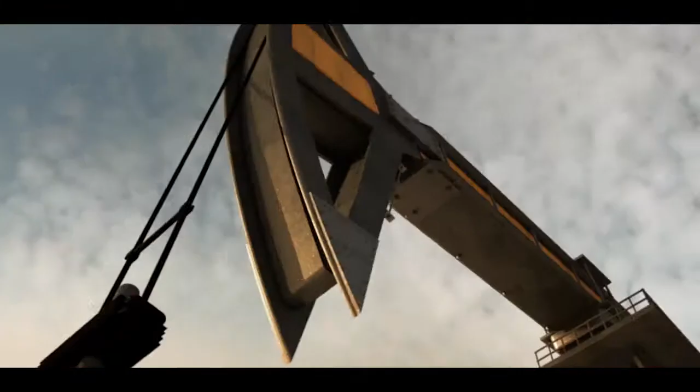No one ever took it for granted. Having been born in the depths of the earth, it became a treasure that gave humankind the power of heat and light, the luxury of freedom, and the might of energy. Natural gas entered each and every home and became a natural, integral part of everyone's life.

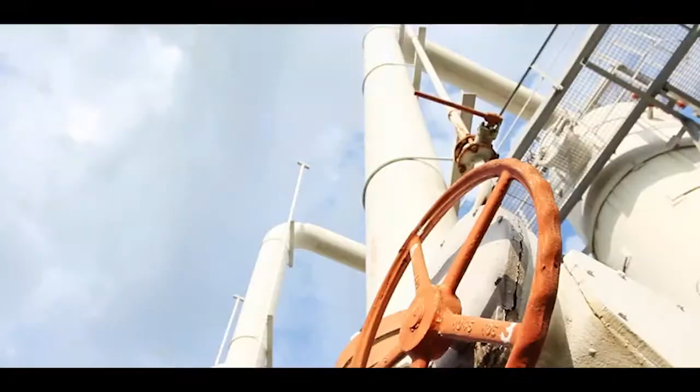Behind its apparent simplicity, however, there is an extremely complex but wonderfully balanced mechanism. The success of this mechanism depends substantially on the performance of our products, which are central to any technological process in the gas industry.

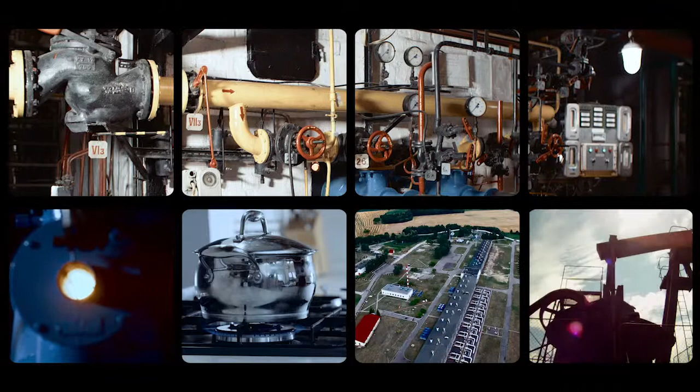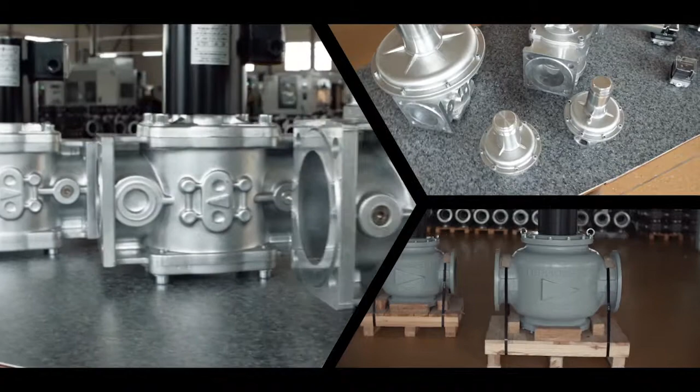Valves by TermoBrest ensure safe and smoothly continuous operation of gas-powered equipment, such as large-scale power facilities providing heat and electricity to entire cities and regions, and household appliances, the undisturbed operation of which ensures comfort in our homes.

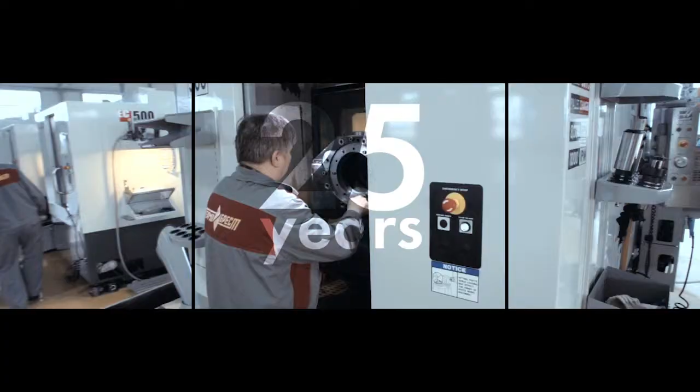From the day of its incorporation and until today, our company has been firmly adhering to three basic principles: quality, reliability, and safety. 25 years of hard and painstaking work, research, trial and error, and ongoing innovations made TermoBrest one of the leaders among gas equipment manufacturing companies in the entire Eurasian continent.

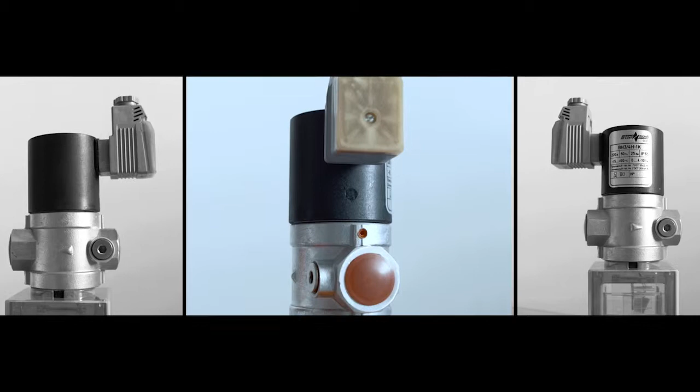At our conception in the early 1990s, we started our journey by manufacturing and offering to the market only 3 items of gas equipment. Striving to meet growing demands of the market and to attain excellence, we have never stopped on the achieved, and responding to the challenges of time in the market, we took every opportunity to improve available products and broaden the number of series of items manufactured. We currently manufacture and offer to the market more than 7,000 types and series of items.

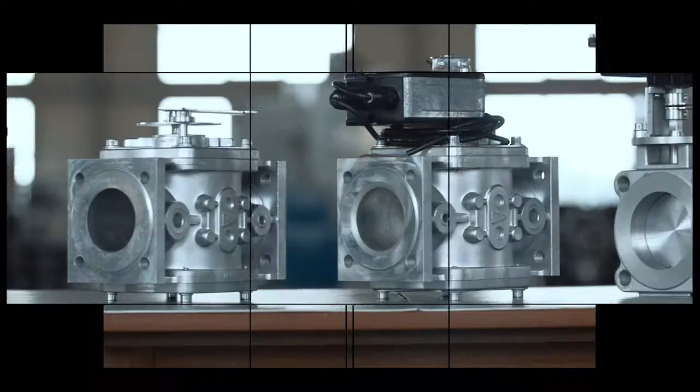And keeping up with our tradition of always striving for more and better, we are not planning to stop innovating. Today's TermoBrest is a modern, large-scale, highly technological company with an almost completely closed production cycle.

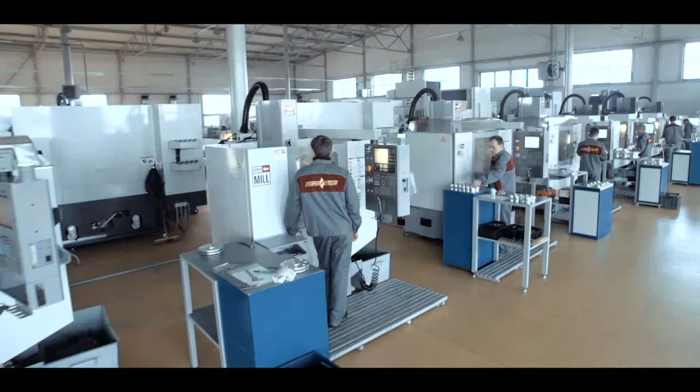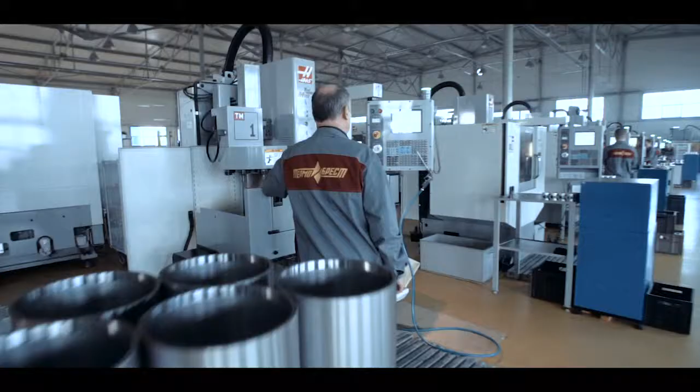We value our reputation and pay special attention to the quality of our products. We use the latest high-performance equipment, the best quality components and raw materials. Our employees are highly skilled professionals who are best at what they do and are constantly improving their skills in order to be always ready to respond in a timely manner to the challenges and demands of the market.

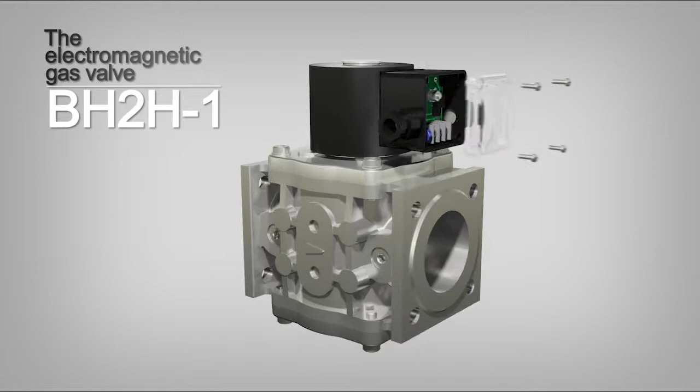Our product range is vast, diverse, and constantly expanding. Let's take a closer look at the composition of one of our base products, as an example of the most popular and marketable of the products manufactured by TermoBrest: the electromagnetic gas valve BH2H-1.

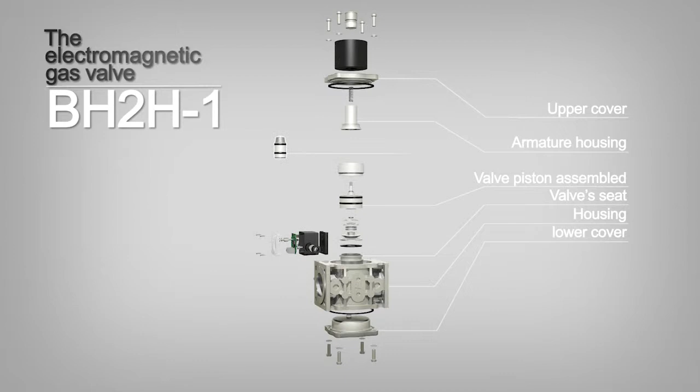Main components of the valve are as follows: housing, upper and lower cover, valve's seat, armature housing, valve piston assembly, armature, spring, electromagnetic coil, and sealing made of oil-resistant resin mixture.

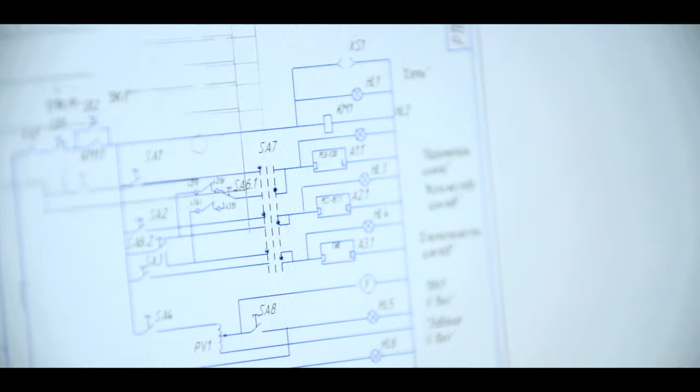Like everything else in this world, our company's production process starts with an idea. Conceived in the Department of Construction and Quality Control, the idea is then refined, improved, repeatedly checked, and brought to perfection, following which it is sent to production.

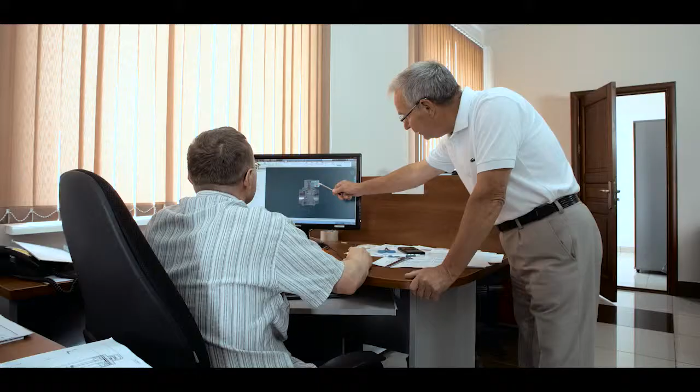Each of our products goes a long way from the first stroke of a pencil on the paper to make an initial sketch to the creation of a 3D model. We simultaneously develop casting tools for the production of the base parts of the valve, which are the body and the caps. The entire production process is monitored by the construction and technology team.

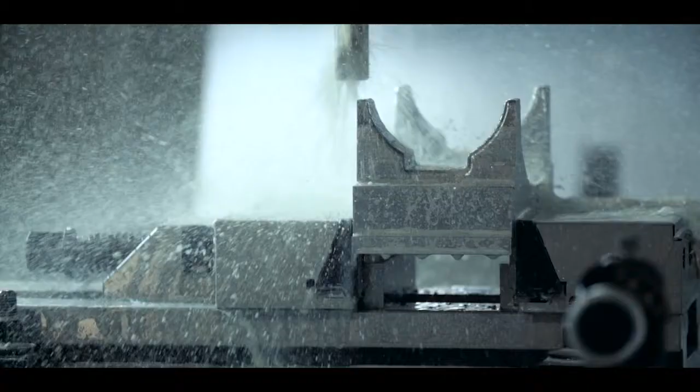This team also oversees the creation of operating schedules, calculation of time slots and material consumption, choice of tools, development of the programs for NC machine tools, and other critical processes. The team develops the process of manufacturing components, casting, and technological tools.

And finally, when the idea has acquired its tangible shape, it sees the light of the foundry, the most sizzling of all the departments in our company. Our foundry is unique. Highly qualified professionals, modern equipment, and years of experience allow us to produce castings of the highest quality, on par with those made for aviation.

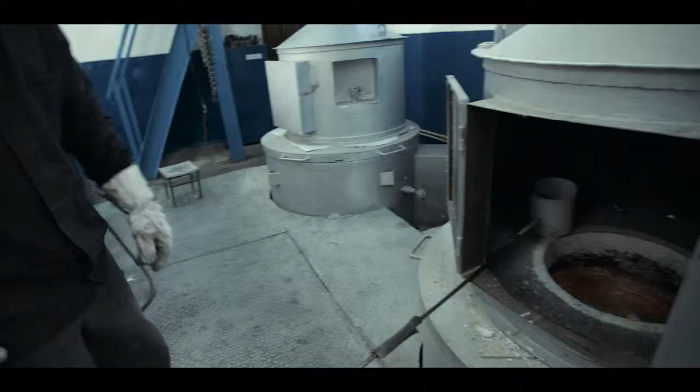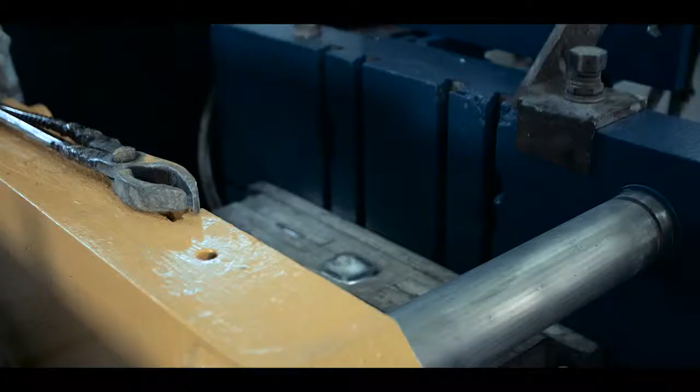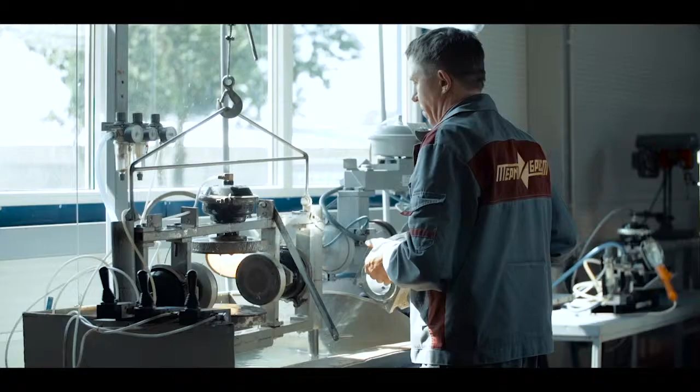Every item cast here undergoes a thorough inspection and is tested for leakages in specially equipped laboratories. The items that fail the tests are marked as spoilage, rejected, and sent back to recasting. There is no other way, and we are unwilling to compromise, because the safety of an entire mechanism depends on the housing leak tightness.

Cast parts of the valve undergo further mechanical processing by NC machine tools, following which our technical control department checks the compliance of the main parameters of the parts with technical documentation. Finally, the parts are sent to the storage facilities.

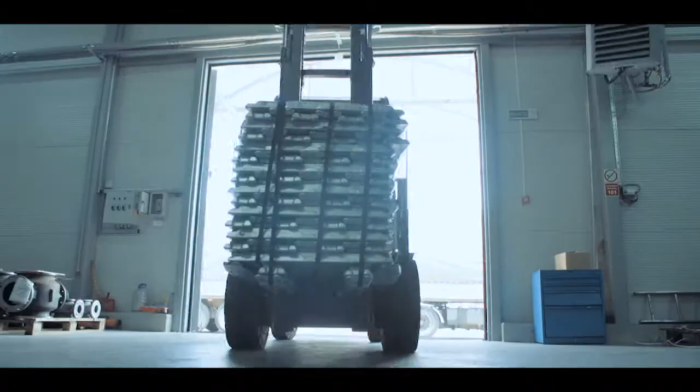The quality of every part depends on the quality of the initial material and processing technology levels. In our production, we use non-ferrous alloys and stainless steel of the highest quality. These materials are delivered from storage facilities to the preparation department.

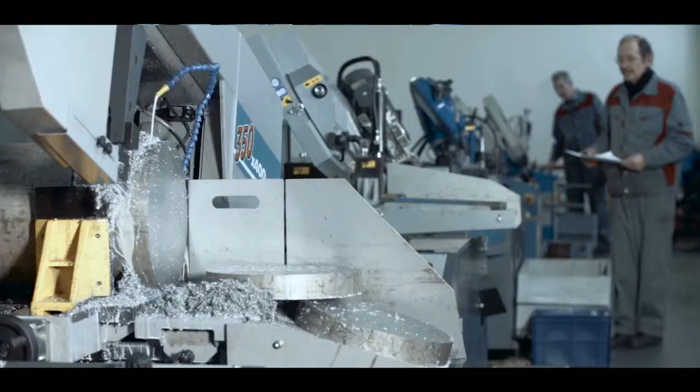Here they are cut into slabs with bandsaw machines and then moved to the departments of metalworking lathes and milling machines. Here the slabs are processed in accordance with technological programs and turned into components.

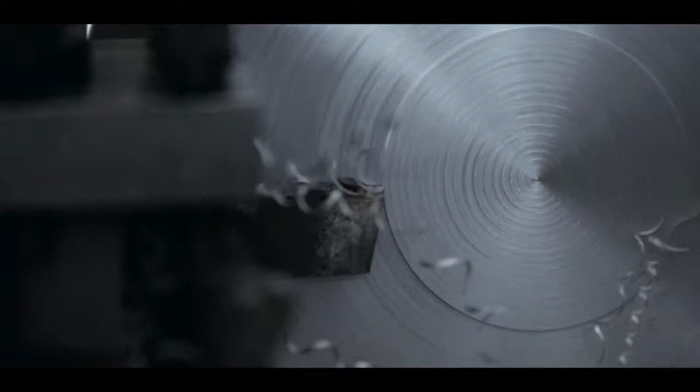The mechanical department of our company is equipped with high-precision CNC lathes and mills. Today we can produce components of extremely high design sophistication with maximum quality.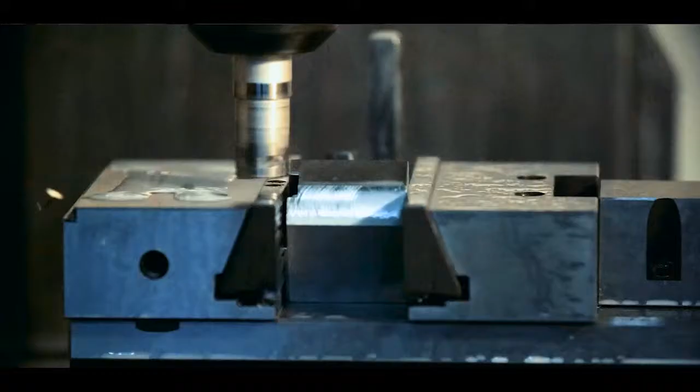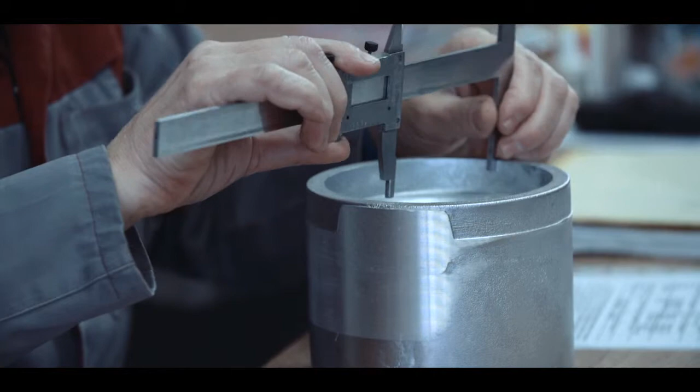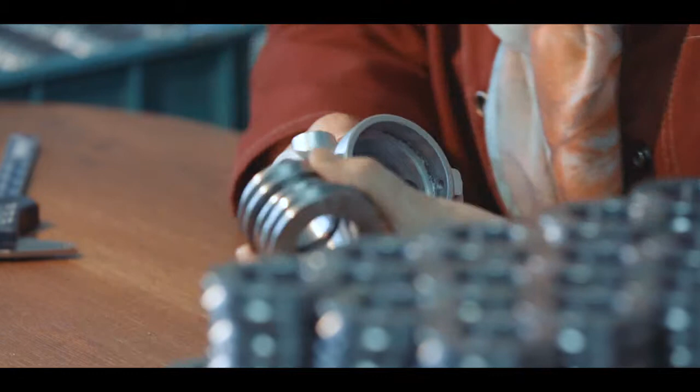On every stage of production, the components undergo strict quality control inspections. They are checked by the machine operator first, and then by our technical inspection team. This approach eliminates the chances that components with deviations in size or shape will be used in the production process. Faulty components can lead to issues during assembly of finished products, something that is completely unacceptable here at TermoBrest.

After the check, finished components are put in sub-assemblies and transferred to storage facilities, where they are kept until ready for the final stage of production. Our storage facilities are equipped with a product monitoring system, which allows controlling the quantity of components and maintaining the required reserves.

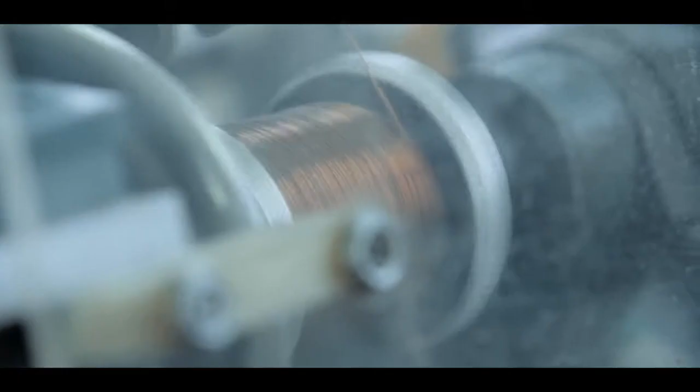The most important part of the valve is the electromagnetic coil that operates the valve's gate. The coil consists of a polymeric cage, an enamel wire, steel body, and terminal block with control board.

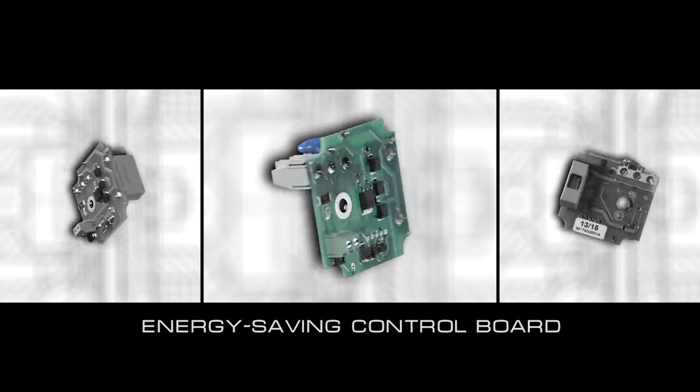The control board is an important part of the coil. It was developed in Germany especially for our coils. This control board cuts the coil's energy consumption in half, 10 seconds after operation starts. We strive for our products to be as environmentally friendly as they are reliable and efficient.

Finally, all the components of the valve are ready. Now it's time for the components to be assembled into one unit. At this stage of production, fitters get to work. Components are delivered to the assembly area. Here, fitters follow instructions which describe in detail the assembly process.

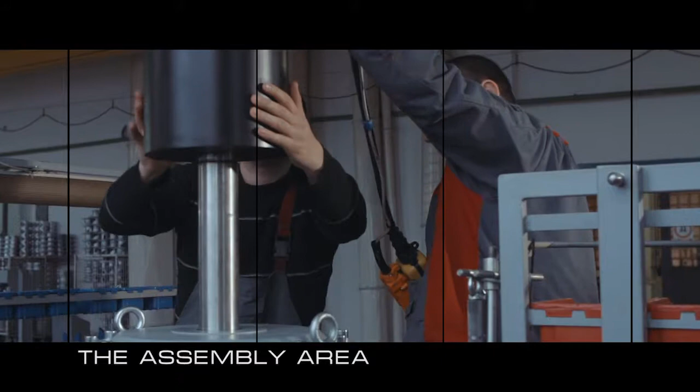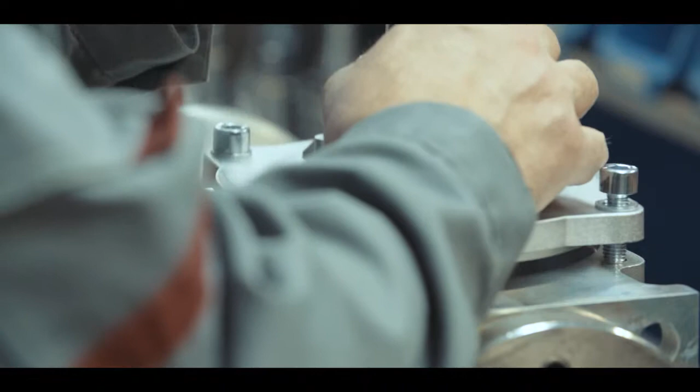Assembly is performed on platforms specially designed for our production. The tools used by fitters are specific and unique. The valve components are assembled and the final units are taken for post-production tests.

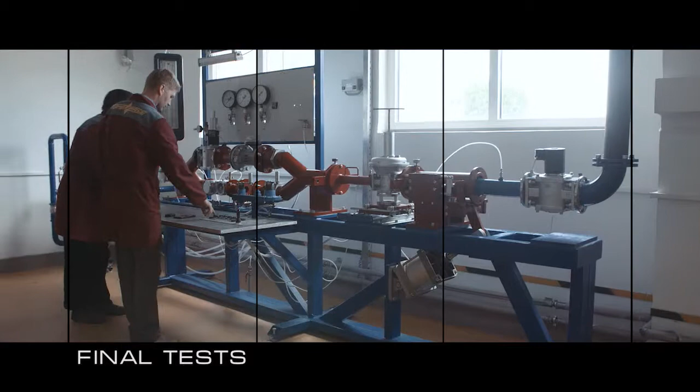Although every component undergoes a number of multi-stage quality controls throughout the entire process of production, only final tests can show whether the valve is ready for operation. Final tests are held to ensure compliance of the end products with the main standards of performance and leak tightness used in the gas industry.

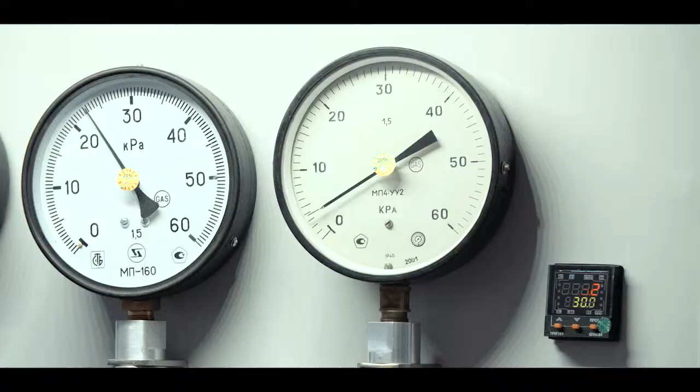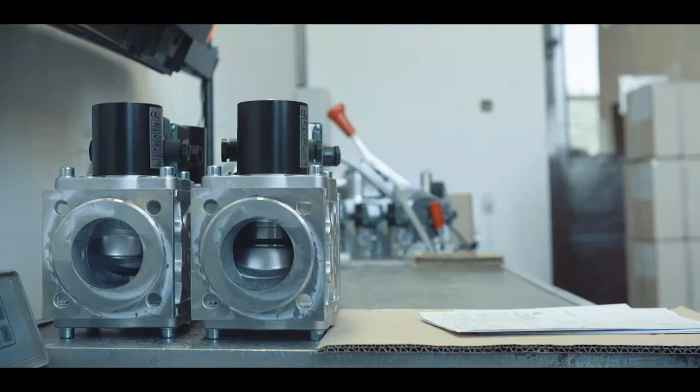Following the completion of final tests, each valve is given a unique serial number and certificate confirming successful completion of tests and compliance with the required industry standards. Having passed all stages of production, valves are wrapped in special packages and sent to the storage facilities where they are stored until shipped to the consumer.

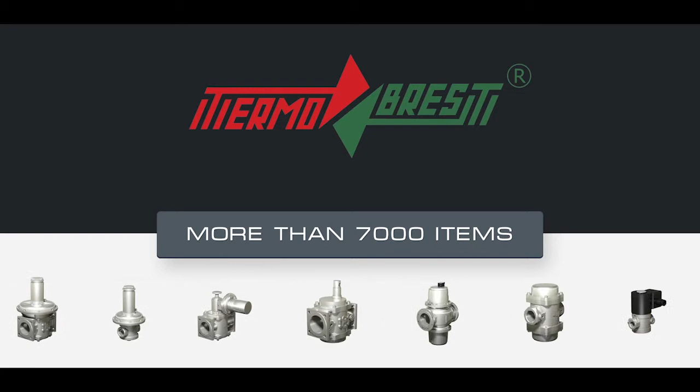Every unit manufactured by TermoBrest goes through the same process. Today we offer our clients more than 7,000 types, sizes, and modifications of products, which together provide for a safe, efficient, and technologically optimal use of hydrocarbon and other non-corrosive gases.

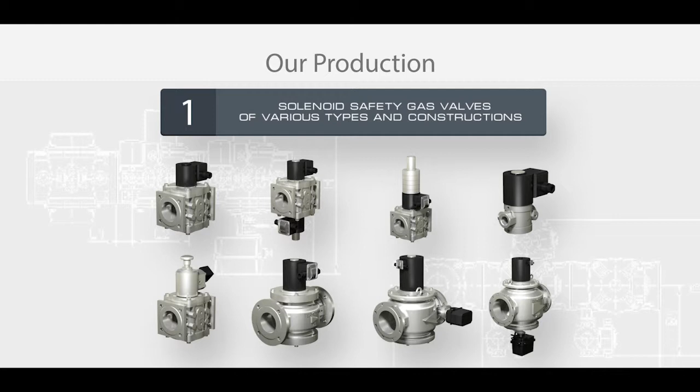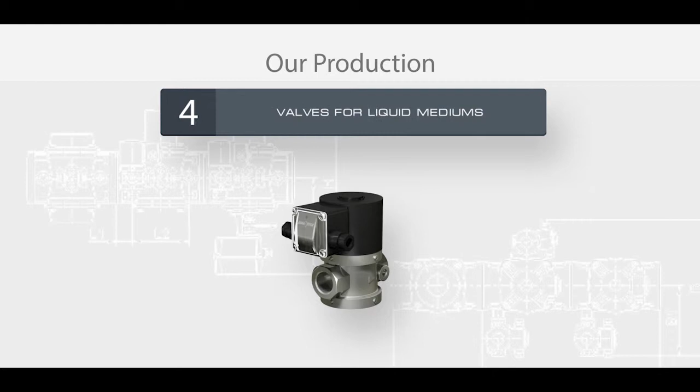The products we offer are the following: solenoid safety gas valves of various types and constructions, safety valves, shut-off valves, valves for liquid mediums, gas filters, pressure regulators, stabilizers, gas control shutters with manual and electrical operation, pressure switches, gas valve block units for the gas equipment of any operation type.

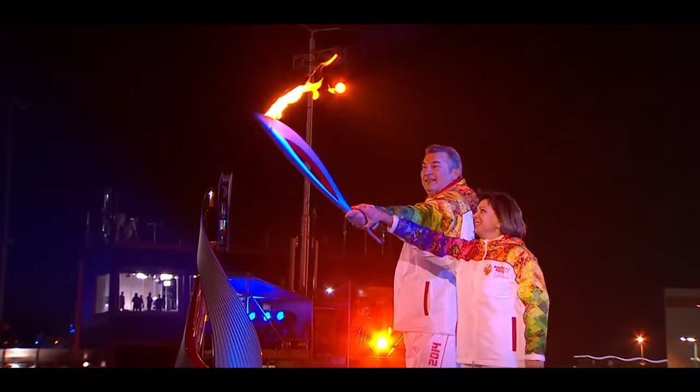All products of TermoBrest are of its own development and design. More than 85% of our products are exported. Gazprom, Lukoil, Rosneft, Russian TGK, and many other long-established and well-known companies trust the highest quality behind the trademark of TermoBrest. Our solenoid valves and filters were used in the Sochi Olympic Games facilities and have performed flawlessly.

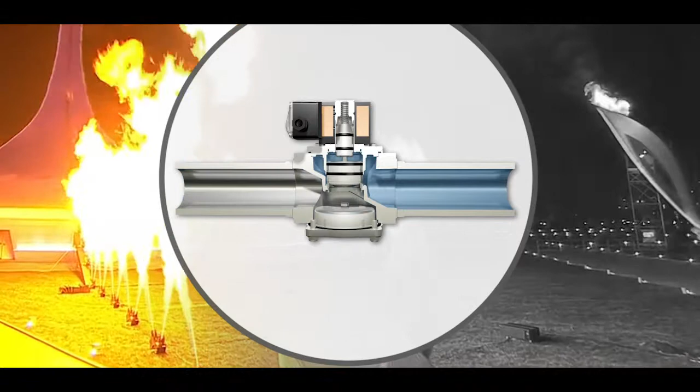TermoBrest products ensured non-stop and secure gas supply right to the Olympic Flame Bowl, as well as to many other strategically important Olympic Village facilities and objects built in Sochi for the Winter Olympics 2014.

Today, the TermoBrest brand is well known far beyond Belarus and the CIS countries. Our products are sold on the vast territory from Norilsk to Hanoi and Yuzhno-Sakhalinsk to Dusseldorf, and we continue to conquer new markets. We pay special attention to timely production and delivery of our products.

We guarantee delivery of any quantity of any item in no more than 10 days. Such a short delivery time is a key factor of success in the valve industry that demands quick responses to every customer's needs. Being on time, every time, is how we raise competitiveness of TermoBrest trademark dramatically and keep it high in modern market-intense conditions.

Over the years, we have created an extensive dealer network. Only on the territory of the former Soviet Union, we have 22 representatives. Moreover, we have dealers in Poland, Germany, and China. Our approach is also unique in its pricing policy. Fixed prices allow our customers to avoid unnecessary expenses on the maintenance of intermediaries.

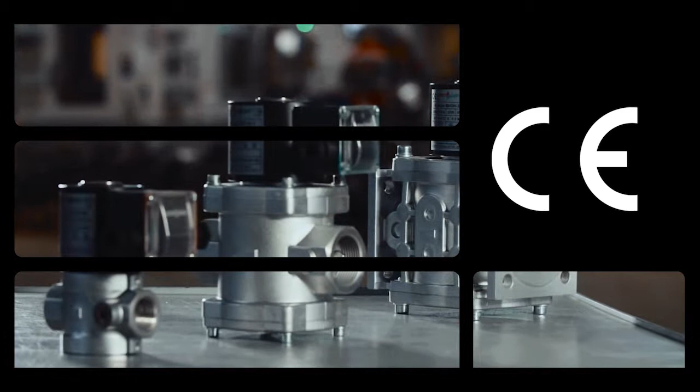Our quality management system is certified in accordance with ISO 9001-2008. All products of TermoBrest are fully compliant with the European standards and regulations and bear the CE mark. Following the creation of the Eurasian Economic Union, TermoBrest was one of the first companies to receive the right to market its products with the EAC mark.

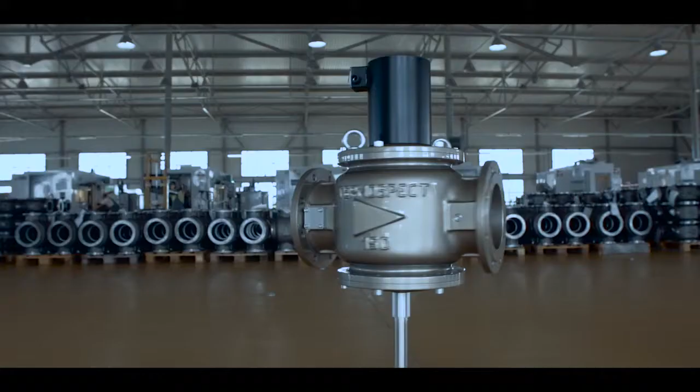All our products are certified on a regular basis, and relevant certificates are always obtained upon the first application to the competent authorities. That, once again, proves the excellent quality and consistently high level of our production.

In 2014, the Foundation for Support of Business Initiatives of the Russian Federation awarded the products of TermoBrest with the National Quality Mark together with an honorable title of the Quality and Reliability Guarantor in the Russian Federation. In December of the same year, our company became a winner of an annual national award, the Economic Support of Russia 2014, and received a title of the Company of National Importance.

In March 2015, the Foundation for Support of Business Initiatives of the Russian Federation, at their annual national award ceremony, Company Number 1 2015, awarded our company the title of Reliable Supplier of Products and Services.

We love what we do and believe it to be useful and important. We value our good reputation, which is a result of hard and dedicated everyday work for over a quarter of a century. We never stand still.

Many years of industrial expertise and the latest technology allow us to maintain and set the highest standards of quality. It is very important for us to be your reliable partner. We are confident in the future and are willing to work with you to realize the most ambitious and challenging projects.